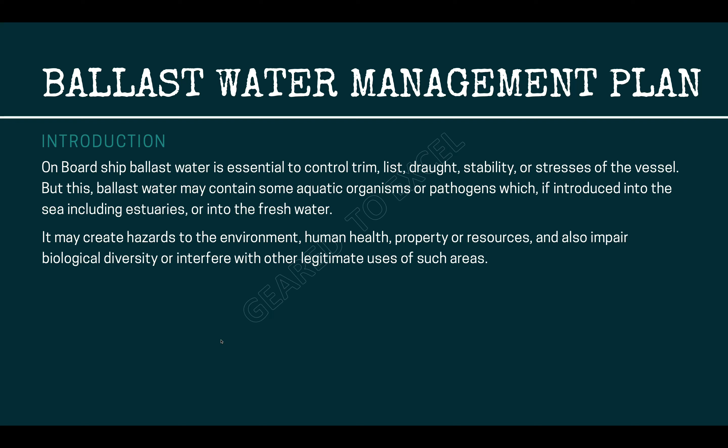Introduction. On board ship, ballast water is essential to control trim, list, draft, stability, or stresses of the vessel. But this ballast water may contain some aquatic organisms or pathogens which, if introduced into the sea including estuaries, or into fresh water, may create hazards to the environment, human health, property, or resources, and also impair biological diversity or interfere with other legitimate uses of such areas.

Ballast water management plan is written in accordance with the requirements of Regulation B1 of the International Convention for the Control and Management of Vessels' Ballast Water and Sediments, 2004, the Convention, and the associated guidelines. This plan may be inspected on request by an authorized authority.

Purpose. The purpose of the Ballast Water Management Plan is to meet the requirements for the control and management of vessels' ballast water and sediments in accordance with the guidelines for ballast water management and the development of ballast water management plans, G4, Resolution MEPC.127(53). It provides standard operational guidance for the planning and management of vessels' ballast water and sediments and describes safe procedures to be followed.

The selection of appropriate methods of ballast water management should take into account the need to ensure that ballast water management practices used to comply with the Convention do not cause greater harm to the environment, human health, property, or resources of any states and the safety of vessels than they prevent.

The plan has to be approved by the Classification Society and no alteration or revision shall be made to any part of it without the prior approval of class.

Ballast water management system, BWMS, means any system which processes ballast water such that it meets or exceeds the ballast water performance standard in Regulation D2. The BWMS includes ballast water treatment equipment, all associated control equipment, monitoring equipment, and sampling facilities.

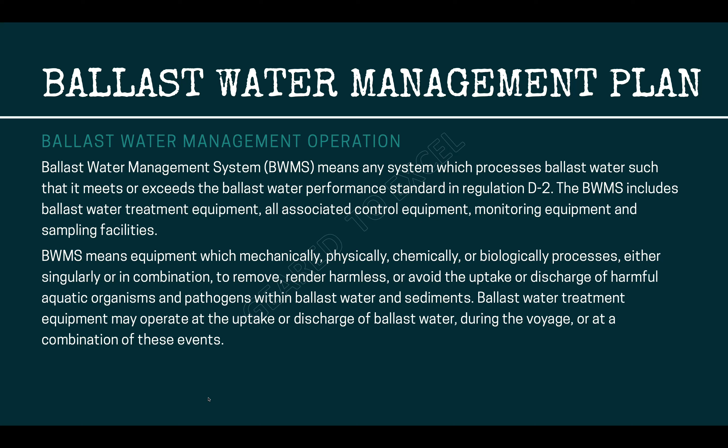BWMS means equipment which mechanically, physically, chemically, or biologically processes, either singularly or in combination, to remove, render harmless, or avoid the uptake or discharge of harmful aquatic organisms and pathogens within ballast water and sediments. Ballast water treatment equipment may operate at the uptake or discharge of ballast water, during the voyage, or at a combination of these events. Ballast water exchange can also be used for the vessel, but only to meet the standard described in Regulation D1.

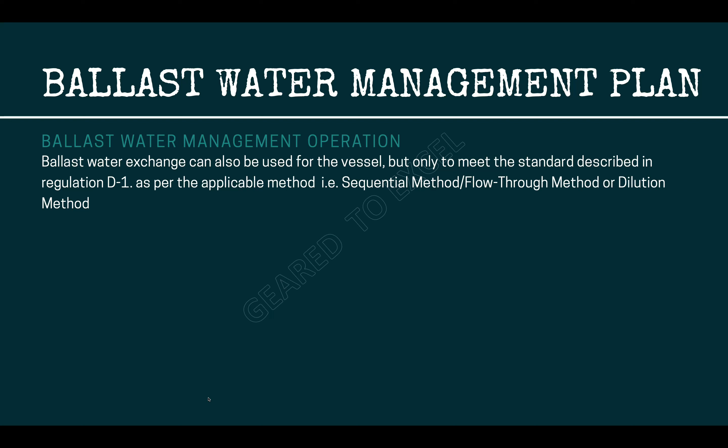As per the applicable method, i.e. sequential method, flow-through method, or dilution method.

BWMS means equipment which mechanically, physically, chemically, or biologically processes, either singularly or in combination, to remove, render harmless, or avoid the uptake or discharge of harmful aquatic organisms and pathogens within ballast water and sediments. Ballast water treatment equipment may operate at the uptake or discharge of ballast water, during the voyage, or at a combination of these events. During normal conditions, the treatment system is to be used for ballast water operations. However, it is possible to bypass the plant and then ballast exchange can be conducted.

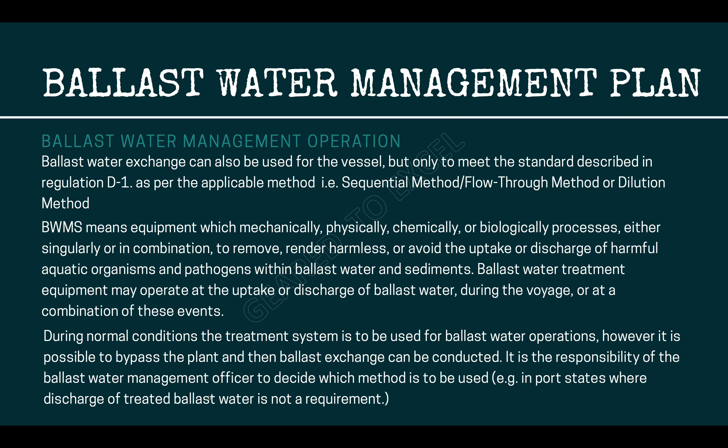It is the responsibility of the ballast water management officer to decide which method is to be used, e.g. in port states where discharge of treated ballast water is not a requirement. It is the master's responsibility to control the safety of the vessel at all times. This includes evaluation of stability and longitudinal strength throughout the sequential exchange sequence. The sequence should be followed for an acceptable sequence for a specific loading condition.

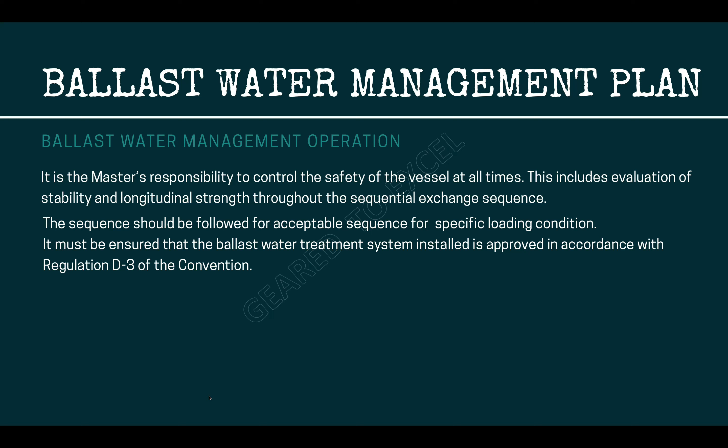It must be ensured that the ballast water treatment system installed is approved in accordance with Regulation D3 of the Convention. All systems type-approved by any IACS class society and physically inspected by a class surveyor after installation should fulfill this requirement. The system should only be operated in accordance with the system design criteria and manufacturer's operational and maintenance instructions. When the system encounters malfunctions or failure, these are to be recorded in the ballast water record book.

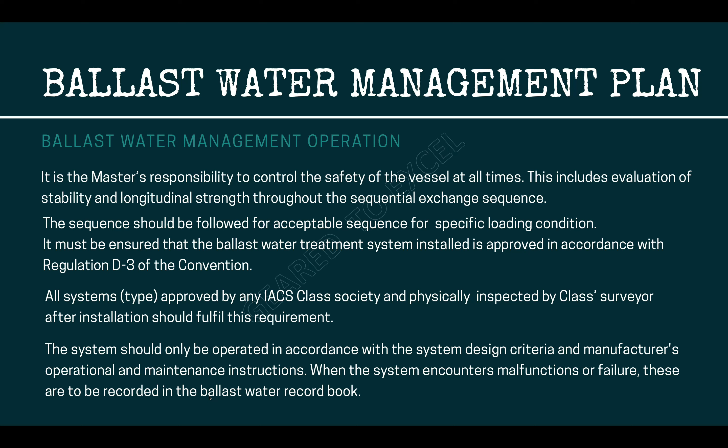Ballast water exchange. There are three methods of ballast water exchange which have been evaluated and accepted by IMO: the sequential method, the flow-through method, and the dilution method. The flow-through and dilution methods are considered pump-through methods.

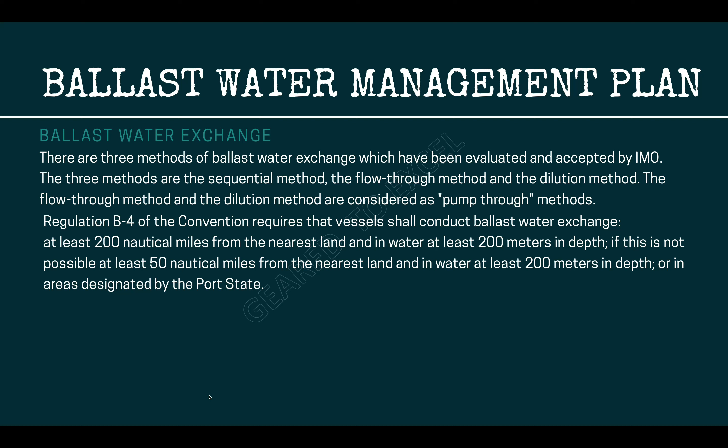Regulation B4 of the Convention requires that vessels conduct ballast water exchange at least 200 nautical miles from the nearest land and in water at least 200 meters in depth. If this is not possible, at least 50 nautical miles from the nearest land and in water at least 200 meters in depth, or in areas designated by the port state.

All local and/or national regulations should be taken into consideration, as they may specify other depths and distances from land. A vessel shall not be required to deviate from its intended voyage or delay the voyage in order to comply with any particular requirement as stated above.

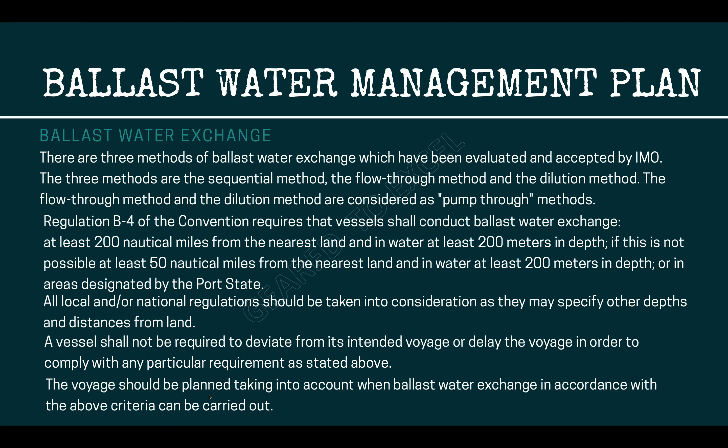The voyage should be planned taking into account when ballast water exchange, in accordance with the above criteria, can be carried out. Because partial exchange may encourage regrowth of organisms, ballast water exchange should only be commenced in any tank if there is sufficient time to complete the exchange to comply with the standard in Regulation D1, and the vessel can comply with the distance from land and minimum water depth criteria in Regulation B4.

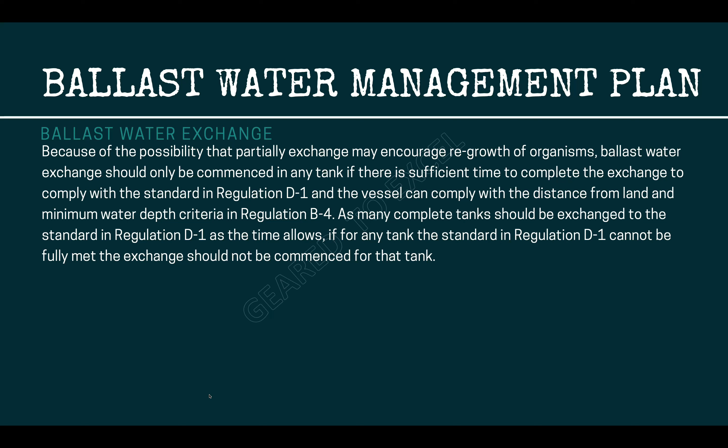As many complete tanks should be exchanged to the standard in Regulation D1 as time allows. If for any tank the standard in Regulation D1 cannot be fully met, the exchange should not be commenced for that tank. In addition, if the master reasonably decides that an exchange would threaten the safety or stability of the vessel, its crew, or passengers because of adverse weather, vessel design or stress, equipment failure, or any other extraordinary condition, he is not required to comply with the above requirements.

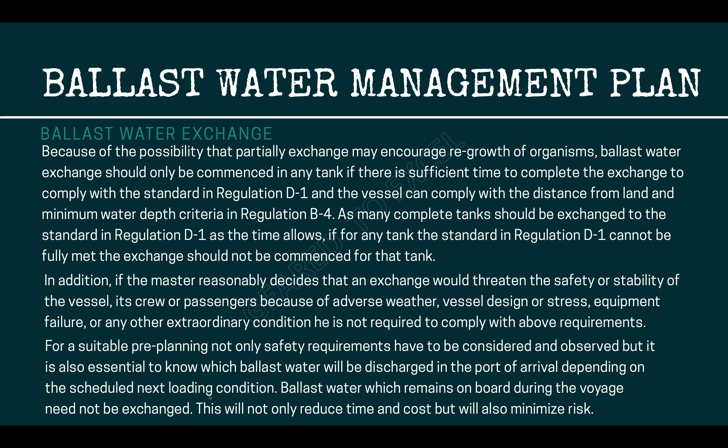For suitable pre-planning, not only safety requirements have to be considered and observed, but it is also essential to know which ballast water will be discharged at the port of arrival depending on the scheduled next loading condition. Ballast water which remains on board during the voyage need not be exchanged. This will not only reduce time and cost but will also minimize risk.

When a vessel is required to conduct ballast water exchange and does not do so in accordance with these requirements, the reasons shall be entered in the ballast water record book.

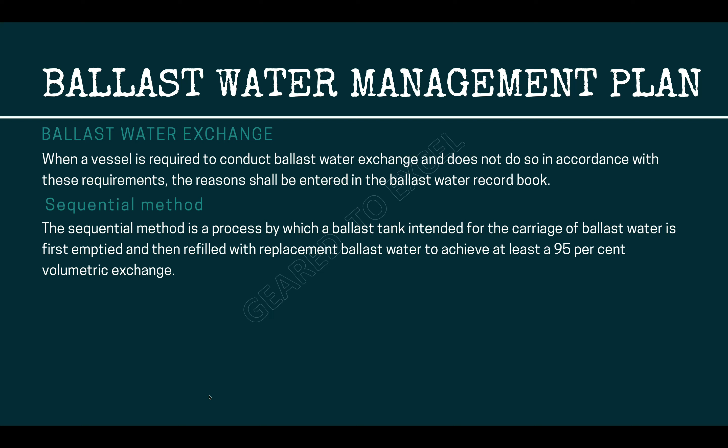Sequential method. The sequential method is a process by which a ballast tank intended for the carriage of ballast water is first emptied and then refilled with replacement ballast water to achieve at least a 95% volumetric exchange. All of the ballast water in each tank should be discharged until suction of the pumps is lost, and stripping pumps or eductors should be used if possible, to avoid a situation where organisms are left in the bottom of the tank. The tank is then refilled with new water rich in oxygen, which might allow the re-emergence of new organisms.

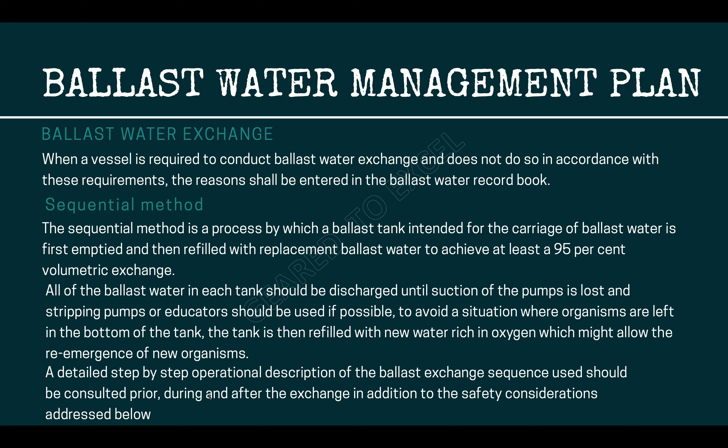A detailed step-by-step operational description of the ballast exchange sequence used should be consulted prior, during and after the exchange, in addition to the safety considerations addressed below.

At the same time, the ballast water management officer should take account of the vessel's position in relation to land, navigational hazards, vessel traffic in the vicinity, current and forecast weather, machinery performance, and degree of crew fatigue, before deciding to proceed to the next pair of steps. If any factors are considered unfavorable, the ballast exchange should be suspended or halted.

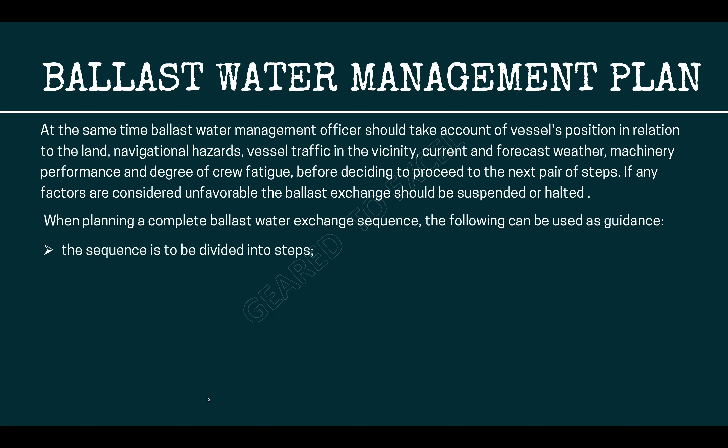When planning a complete ballast water exchange sequence, the following can be used as guidance. The sequence is to be divided into steps. Each step represents emptying or filling one tank or pair of tanks and is to be calculated as any other loading condition on the loading computer. For each step, the maximum free surface moment for ballast tanks being exchanged must be considered, in addition to partly filled tanks.

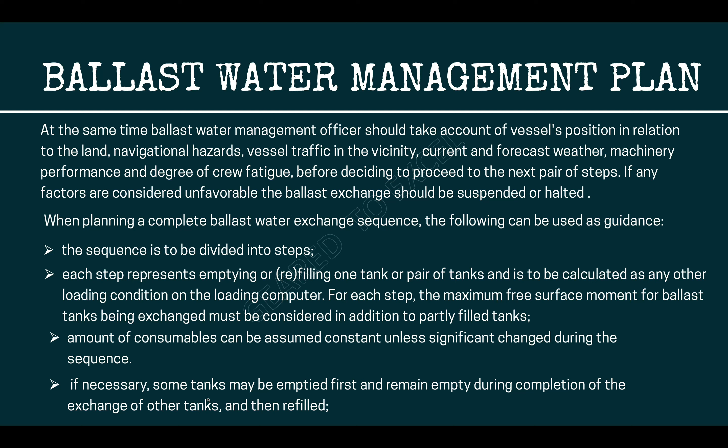Amount of consumables can be assumed constant unless there is significant change during the sequence. If necessary, some tanks may be emptied first and remain empty during completion of the exchange of other tanks, and then refilled. Heel should preferably remain less than 2 degrees in all steps, and execution may be halted at any time for a shorter or longer period.

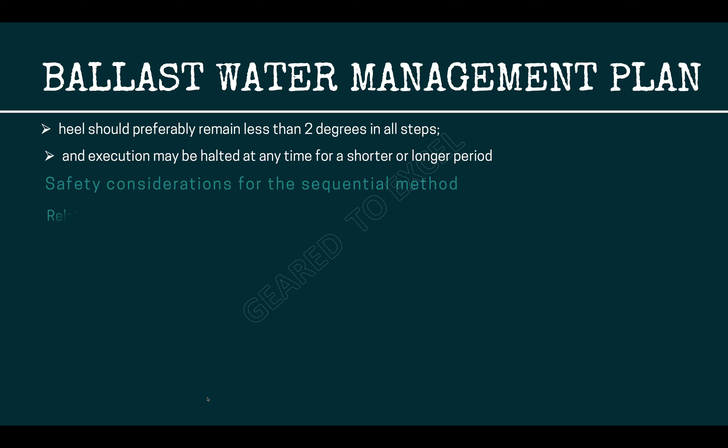Safety considerations for the sequential method. Related to weather: rough sea, bottom slamming in the fore vessel, causing structural damage. This is dependent on the draft forward and the vessel heading.

If slamming is experienced during emptying of some of the tanks, it is possible to stop or reduce this by temporarily altering the vessel's heading or reducing the speed.

Sloshing in tanks, causing deflection or damage to internal tank structure. Strong wind, depends upon the wind direction.

If the ballast water exchange involves steps which cause the vessel to not keep an upright condition at all times, or reduced GM, side wind may contribute to heel or roll. Static heel should be maximum 2 degrees, preferably.

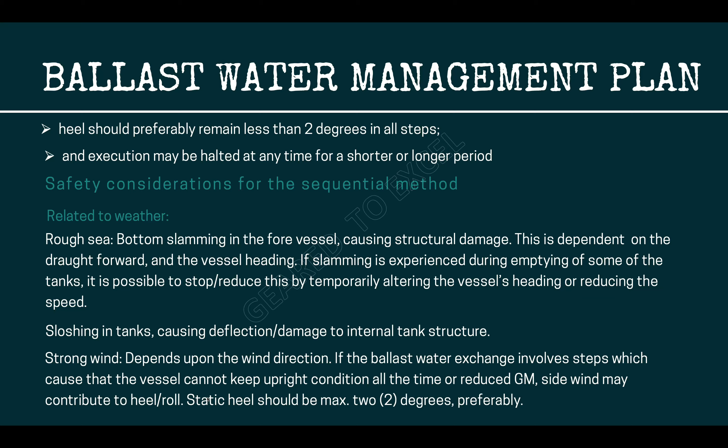Low temperatures in which icing in the ballast tank air pipes may occur. Clogging, ice plugs, or malfunctioning of air vent heads may lead to structural damage to tanks.

Crew safety, if ballast water exchange requires manual deck operations.

Related to internal loads: exceeding permissible maximum allowable limits with respect to longitudinal strength, shear force, and bending and torsional moment. This could cause damage even in good weather conditions, and the stresses increase with increasing waves.

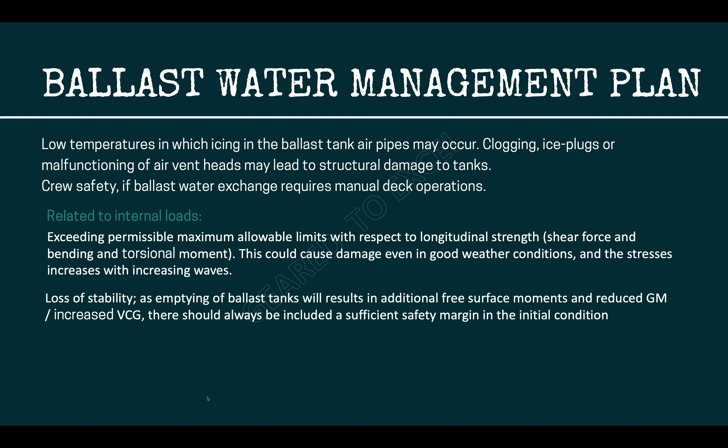Loss of stability, as emptying of ballast tanks will result in additional free surface moments and reduced GM or increased VCG. There should always be included a sufficient safety margin in the initial condition.

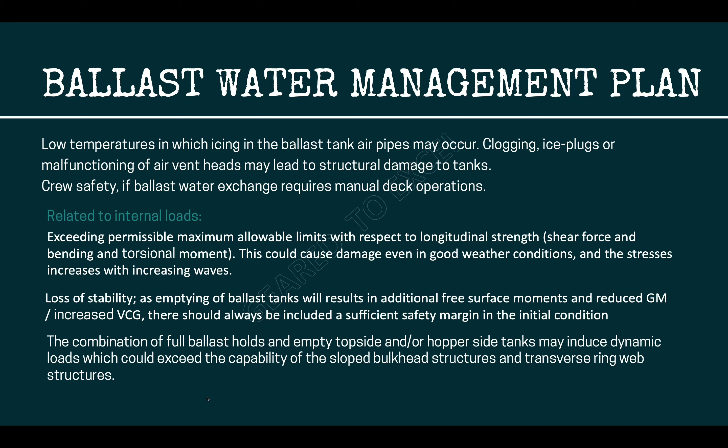The combination of full ballast holds and empty topside and/or hopper side tanks may induce dynamic loads which could exceed the capability of the sloped bulkhead structures and transverse ring web structures.

Related to the vessel's operation: operational limits in the approved trim and stability booklet shall be observed.

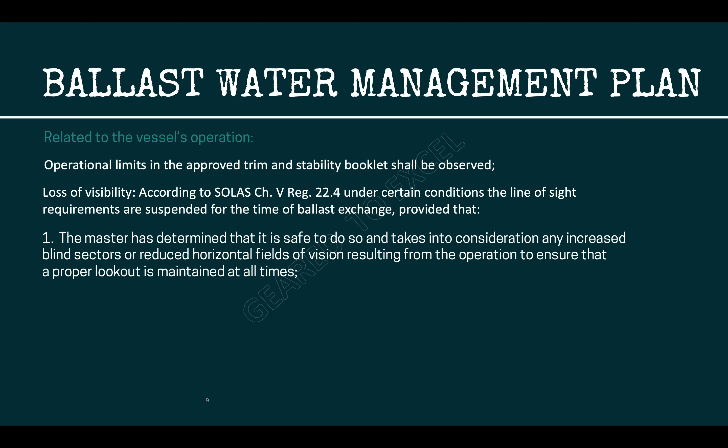Loss of visibility: according to SOLAS Chapter 5, Regulation 22.4, under certain conditions the line of sight requirements are suspended for the time of ballast exchange, provided that, one, the master has determined that it is safe to do so and takes into consideration any increased blind sectors or reduced horizontal fields of vision resulting from the operation, to ensure that a proper lookout is maintained at all times.

Two, the operation is conducted in accordance with the ship's ballast water management plan, taking into account the recommendations on ballast water exchange adopted by the organization, and the commencement and termination of the operation are recorded in the ship's record of navigational activities pursuant to Regulation SOLAS

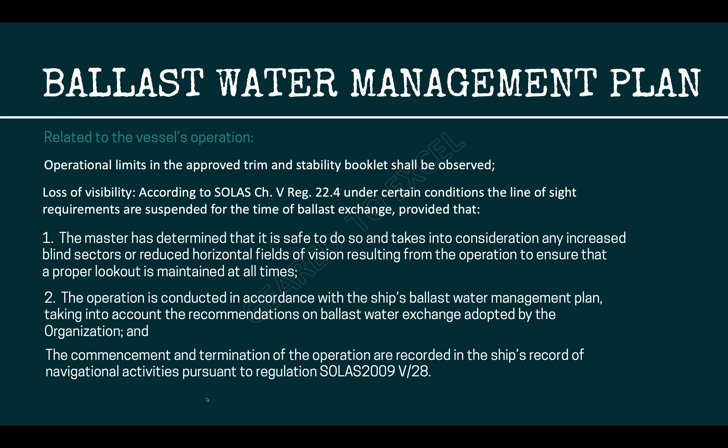2009 V/28. Less propeller immersion: if the draft is reduced aft, the propeller may not be sufficiently submerged.

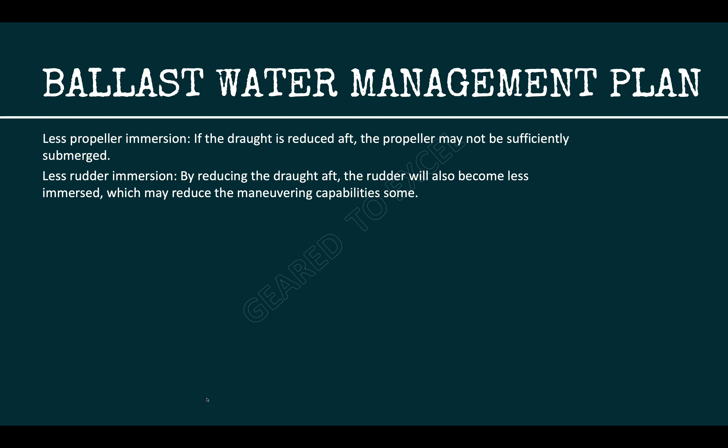Less rudder immersion: by reducing the draft aft, the rudder will also become less immersed, which may reduce the maneuvering capabilities somewhat. Heel during exchange.

If unsymmetrical ballast tanks are exchanged in the same step, the vessel's master should carefully monitor the heel during all steps and take necessary actions to reduce the heel as far as practicable.

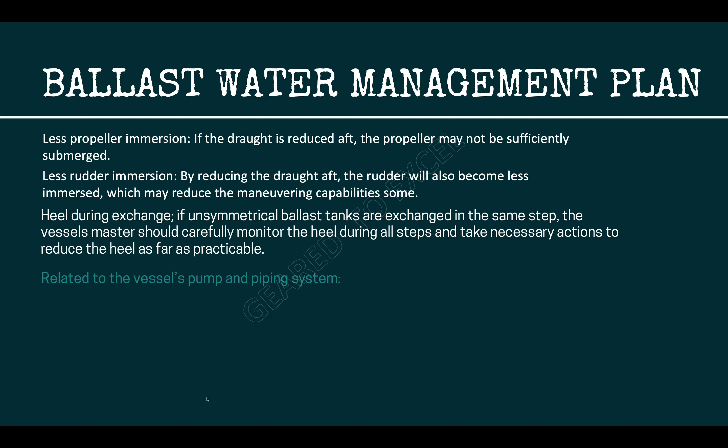Related to the vessel's pump and piping system: system failure. Failure of the system in open sea may have larger consequences than in harbor.

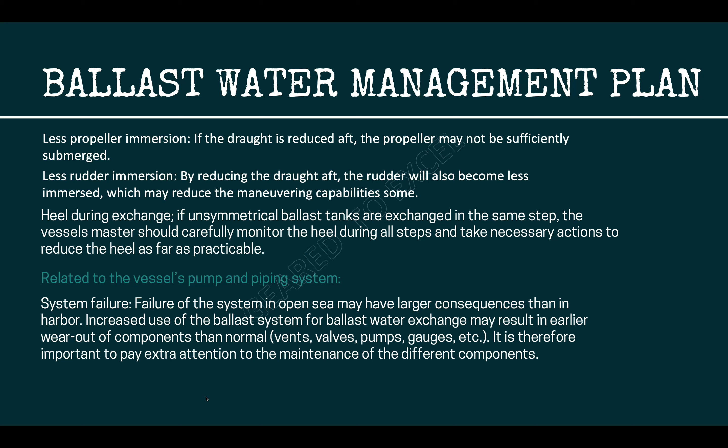Increased use of the ballast system for ballast water exchange may result in earlier wear out of components than normal - vents, valves, pumps, gauges, etc. It is therefore important to pay extra attention to the maintenance of the different components.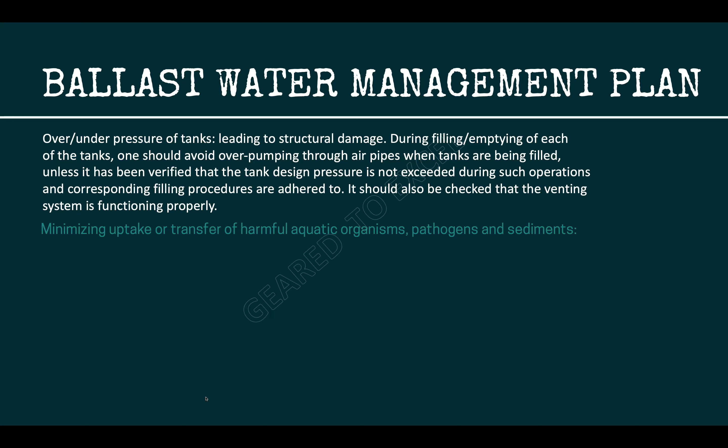Minimizing uptake or transfer of harmful aquatic organisms, pathogens, and sediments. Wherever possible, ballast water should be taken outside of port waters and as far from the coast as practicable.

Consideration should also be given to the use of dockside water supplies, water not taken directly from the harbor, such as fresh water, potable water, etc., as source for ballast water.

When loading ballast water, every effort should be made to avoid the uptake of potentially harmful aquatic organisms, pathogens, and sediments that may contain such organisms.

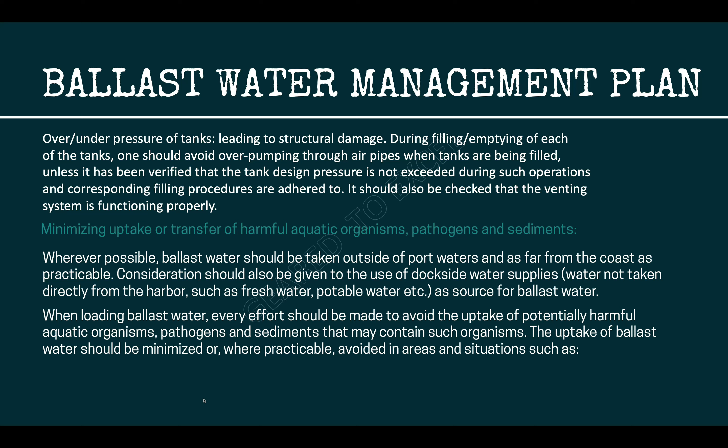The uptake of ballast water should be minimized or, where practicable, avoided in areas and situations such as: one, areas identified by the port state in connection with warnings provided by ports concerning ballast uptake and any other port contingency arrangements in the event of emergency situations.

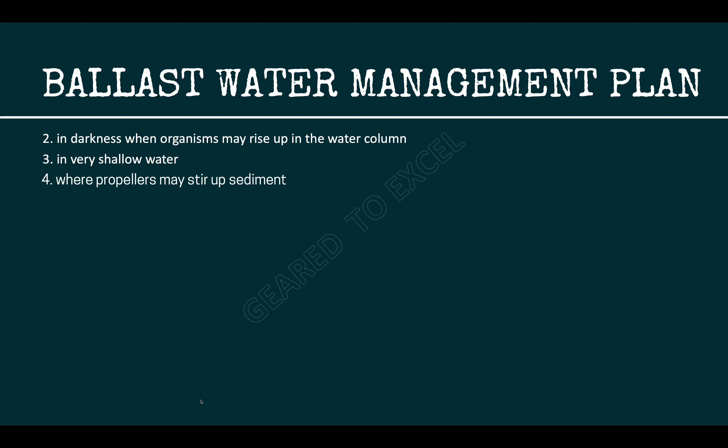Two, in darkness when organisms may rise up in the water column. Three, in very shallow water. Four, where propellers may stir up sediment. Five, areas with current large phytoplankton blooms, algal blooms such as red tides.

Six, nearby sewage outfalls. Seven, where a tidal stream is known to be more turbid. Eight, where tidal flushing is known to be poor. Nine, in areas close to aquaculture. Ten, where dredging is or recently has been carried out.

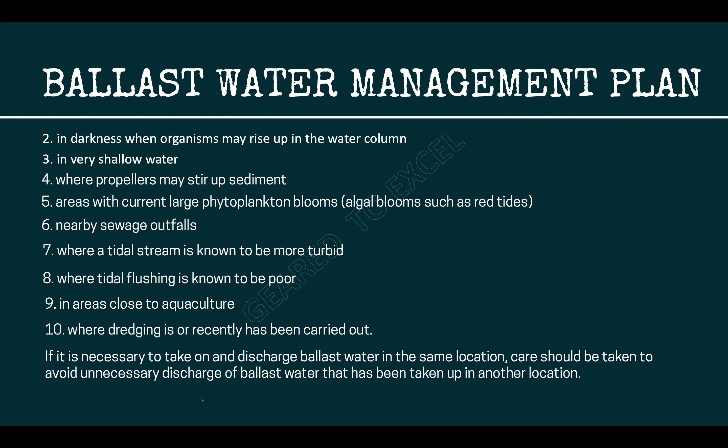If it is necessary to take on and discharge ballast water in the same location, care should be taken to avoid unnecessary discharge of ballast water that has been taken up in another location.